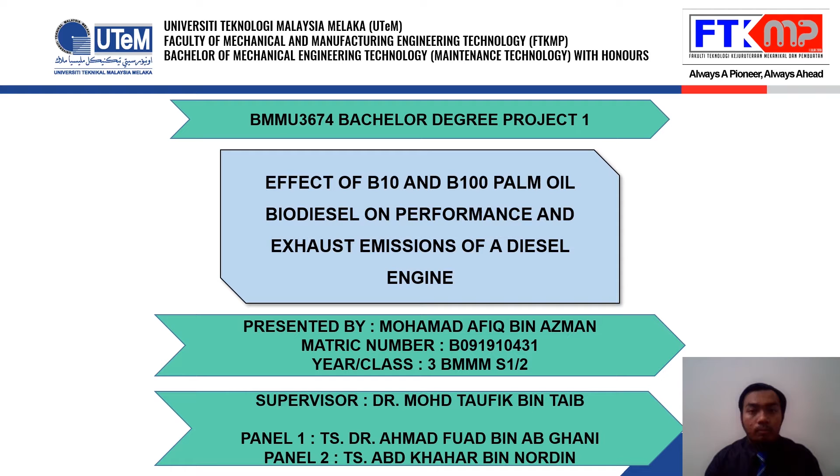My matric number is B091910431. I am from 3B. I am under supervision of Dr. Mohamad Taufik bin Taib, and my research title is Effect of B10 and B100 palm oil biodiesel on performance and exhaust emissions of a diesel engine.

This is my online presentation outline that starts from problem statement to objective, then to scope, literature review, methodology, and lastly preliminary findings.

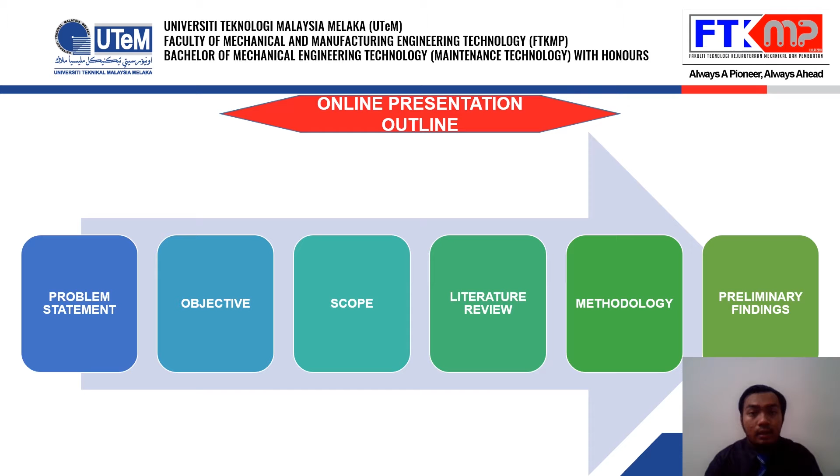For introduction, diesel is one of the primary sources of air pollution in the world because it releases a high amount of carbon monoxide emission and it affects the amount of greenhouse gases that links to climate change and global warming. The crude oil source collected from nature decreases year by year, so fuel price will be higher and affect the nation's economic situation like what happened nowadays.

One of the best solutions to solve this problem is by using biodiesel diesel blends fuel in diesel engines. Biodiesel can be produced from plants like palm, and Malaysia has an advantage for this source since it is widely used and produced in Malaysia. The various compositions of biodiesel blend will produce different outcomes from the engine, and various research has been done to improve the products over time.

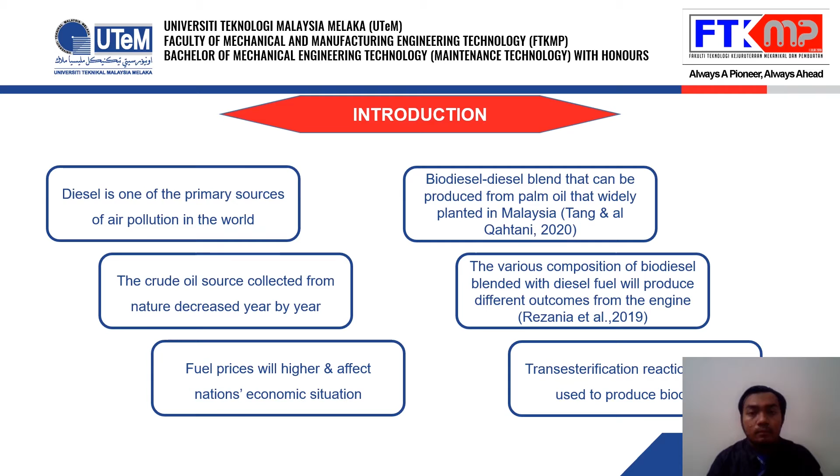Biodiesel can be produced by using the trans-esterification process that will alter its properties to be close to diesel properties to produce performance exactly like diesel fuel. Different feedstocks used to produce biodiesel contain different numbers in their physicochemical properties. Physicochemical properties consist of acid number, calorific value, cetane number, kinematic viscosity, and flash point.

Different compositions of biodiesel will produce different numbers of gas emissions. Compositions means the volume ratio of biodiesel with pure diesel. Different compositions of biodiesel will generate different engine performance from the diesel engine. From these problem statements, the aim of the study is to clarify the exhaust gas emissions and engine performance produced from B10 and B100 palm oil biodiesel diesel blends fuel.

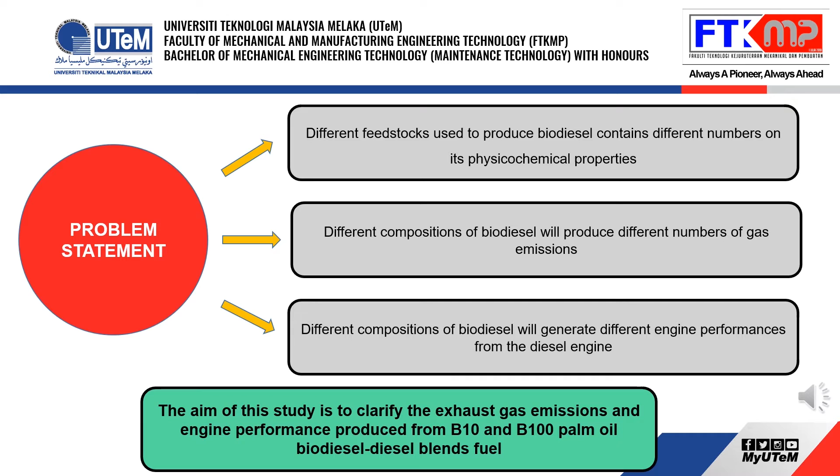The first objective is to produce biodiesel using the trans-esterification process. Second objective, analyze the diesel engine performance of B10 and B100 biodiesel. And last objective, investigate the exhaust emissions of B10 and B100 biodiesel.

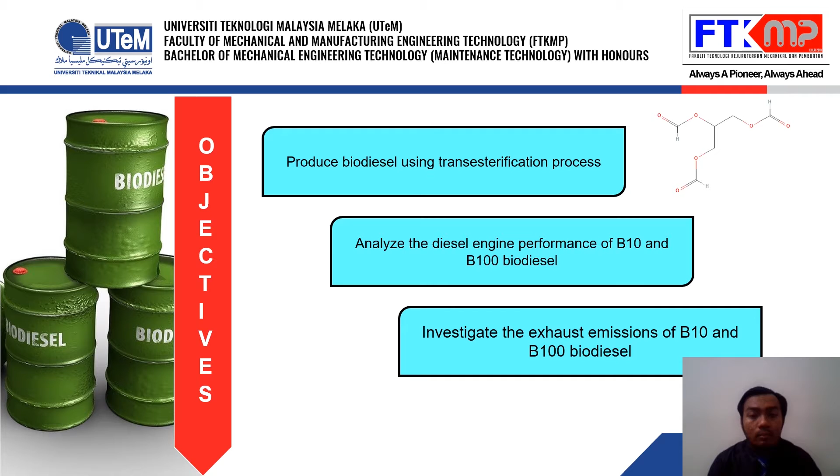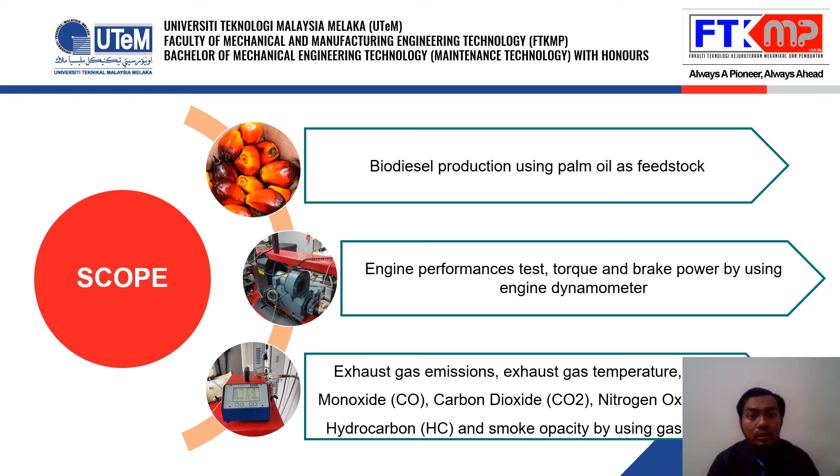The scope of this research is biodiesel production using palm oil as feedstock, engine performance test, torque and brake power by using engine dynamometer, and lastly exhaust gas emissions, exhaust gas temperature, carbon monoxide, carbon dioxide, nitrogen oxide, hydrocarbon, and smoke opacity by using gas analyzer.

For literature review, I had simplified the related terms to my research for better understanding. First, biodiesel is made from feedstocks that combine with pure diesel. Pure diesel is not the one being sold on the market. It can only be obtained from oil and gas companies like Petronas and Shell.

Feedstocks can be categorized into 4 generations, which are first, second, third, and fourth generations. First generation feedstock consists of edible oil, such as corn and palm. Second generation feedstocks consist of inedible oil, such as karanja and jatropha. Third generation feedstocks consist of waste, such as waste cooking oil, animal fat, and algae. Fourth generation feedstocks consist of solar energy being converted to biodiesel, such as photobiological solar biodiesel.

Biodiesel can be produced into various compositions such as B10, which means 10% biodiesel combined with 90% pure diesel. The higher the number, the higher the biodiesel volume used, and the lower the pure diesel volume used. Next, trans-esterification process. There are many other processes other than trans-esterification, but only this process is possible to produce biodiesel with similar qualities as conventional diesel.

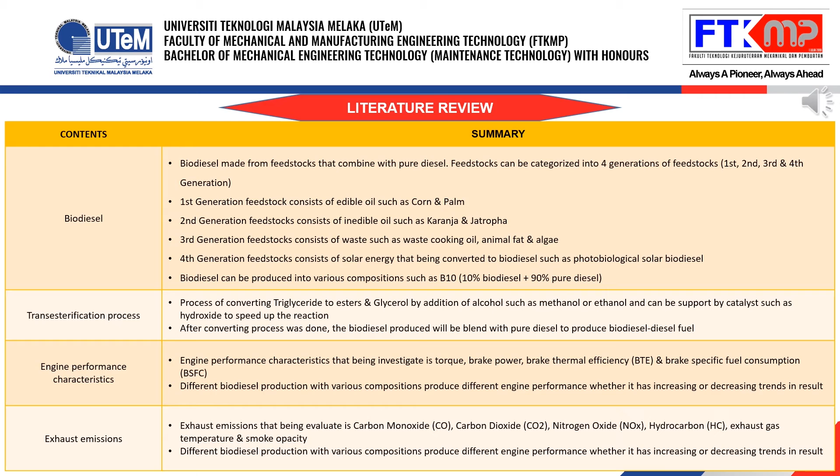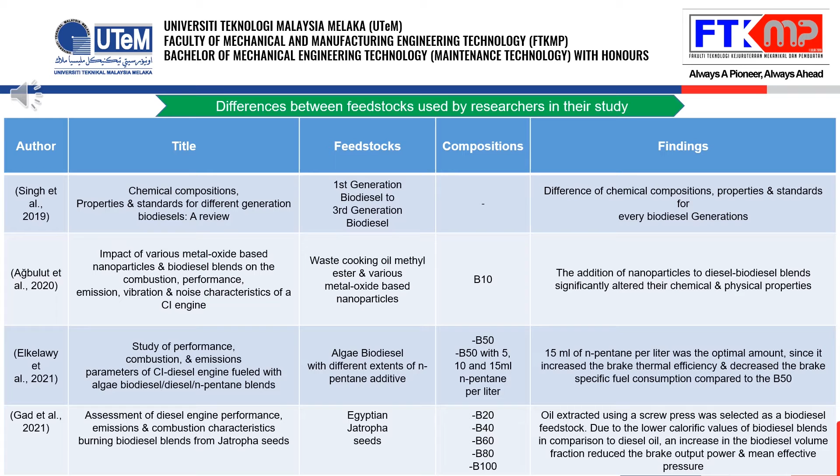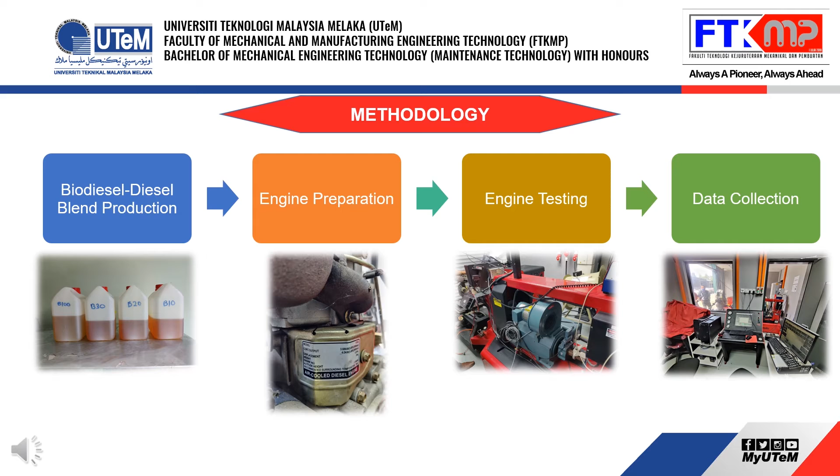For methodology, the process starts with biodiesel diesel blends production, to engine preparation, to engine testing, and lastly data collection. This is my flow chart for the methodology process.

For biodiesel diesel blend production, a blending process has been used to produce biodiesel diesel blends. It is the last step of the trans-esterification process. 1 liter of B10 has been produced from 100 ml palm oil biodiesel and 900 ml pure diesel, that means 10% palm oil biodiesel combined with 90% pure diesel.

Both pure diesel and palm oil biodiesel are blended separately using an electromagnetic stirrer until 100 degrees Celsius, then cooled down to 60 degrees Celsius. Both items are poured in a beaker and blended again until the temperature reaches 70 degrees Celsius, then cooled down to room temperature before being stored in an HDPE container.

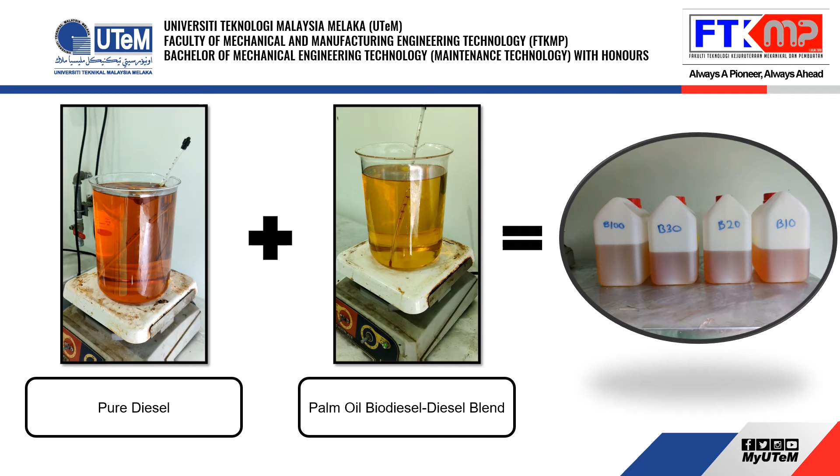For engine preparation and testing, a single-cylinder fuel injection diesel engine was overhauled to inspect the engine components. The engine was coupled to the dynamometer coupling and a gas analyzer sensor was attached to the exhaust. The engine is tested using conventional diesel first to detect any leakage or damage from the engine components. If the engine is free from any leakage or damage, the palm oil biodiesel diesel blend will be tested for its performance and gas emissions on the same engine.

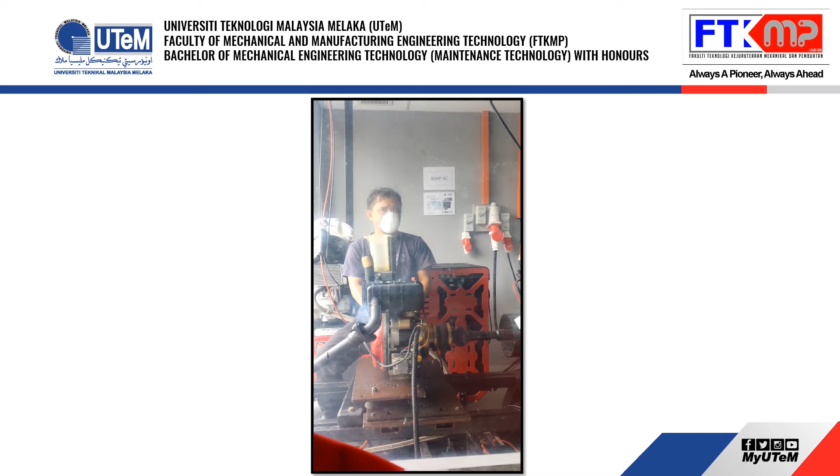For data collection, engine performance data and exhaust emissions data were recorded by Dynomite software. The data was plotted in Excel to study the trend of the data collected from the software. Engine performance consists of torque, brake power and brake-specific fuel consumption. For exhaust emissions, carbon dioxide, carbon monoxide, nitrogen oxide, hydrocarbon, exhaust gas temperature and smoke opacity.

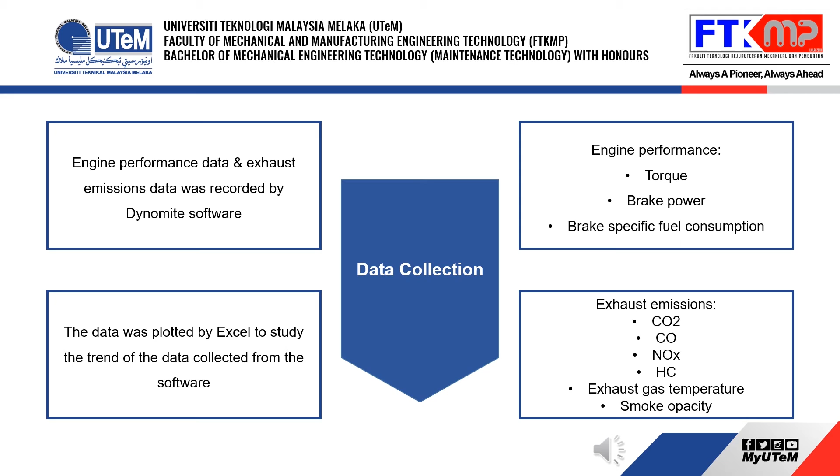For preliminary findings, data from conventional diesel used in the single-cylinder fuel injection engine was recorded and evaluated. For the first graph, the curve becomes steeper from zero load to full load because the piston pushes regularly, which gives a better horsepower output, and the engine did not lose power during the combustion process.

For the second graph, the curve becomes steeper from zero load to full load because of the increasing load. Higher load applied to the engine will push the engine to consume more fuel during acceleration. This behavior will assist the engine to maintain the load, and this can avoid overloading the engine.

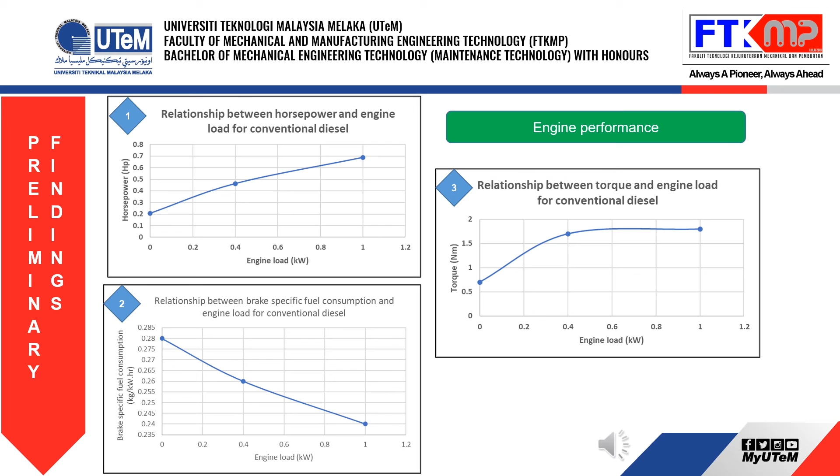For the third graph, the curve becomes steeper from zero load to middle load and slowly becomes constant from middle load to full load because of the increasing load. The engine can still accelerate from zero load to middle load because the load applied can be considered low. But when approaching full load, the engine cannot produce higher torque and it becomes constant along the run.

For the fourth graph, carbon dioxide emission increases because the engine load increases. Higher loads mean higher fuel consumption, so more carbon dioxide will be produced. For the fifth graph, carbon monoxide emission increases because higher load produces more incomplete combustion. For the sixth graph, nitrogen oxide emissions increase with engine load due to an increase in the amount of fuel consumed by the engine. For the seventh graph, hydrocarbon emission increases because of the shortage of oxygen in the engine's operation, which results in a fuel-rich mixture.

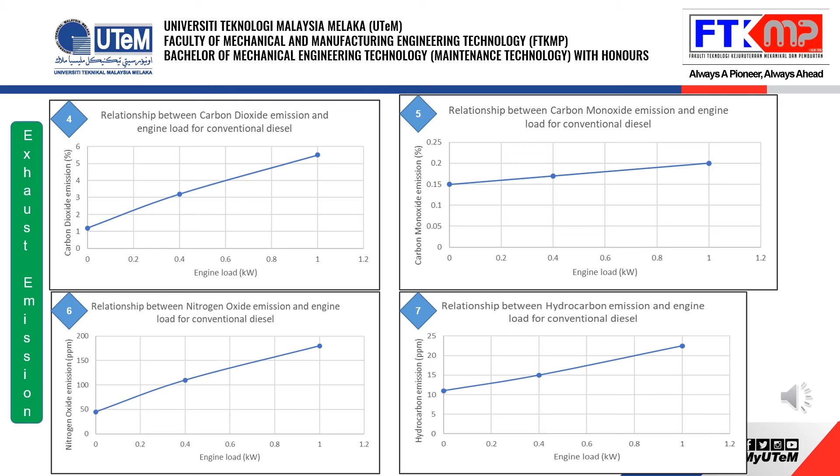For the expected results, based on the article Effect of Biodiesel on the Performance and Emission Characteristics of Diesel Engines, conventional diesel produces higher torque than palm oil biodiesel, and the torque produced becomes lower when the composition of biodiesel increases. Based on the article Performance and Emission Analysis of a Diesel Engine Running on Palm Oil Diesel, carbon monoxide emissions of the palm oil biodiesel diesel blend will be lower compared to conventional diesel, and brake power of palm oil biodiesel will be lower than conventional diesel.

Based on the article Performance and Emissions Characteristics of CI Engine Fueled with Palm Oil Methyl Ester Blended with Diesel Fuel, nitrogen oxide emission will increase as engine load increases for all loads. Based on the article Performance and Exhaust Gas Emission of Biodiesel Fuel with Palm Oil Based Additive in Different Indirect Injection Compression Ignition Engine, brake specific fuel consumption of the palm oil biodiesel diesel blend will be higher than conventional diesel, and higher palm oil biodiesel blends require more fuel to provide the same amount of brake power.

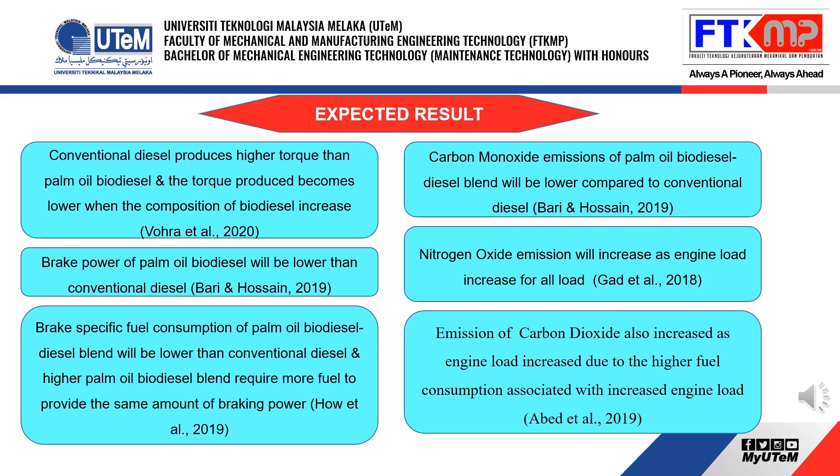Based on Effect of Biodiesel Fuels on Diesel Engine Emissions, emission of carbon dioxide also increases as engine load increases due to the higher fuel consumption associated with increased engine load. Based on the article Performance and Emission Characteristics of CI Engine Fueled with Palm Oil Methyl Ester Blended with Diesel Fuel, hydrocarbon emission will decrease for palm oil biodiesel at all engine loads compared to conventional diesel fuel due to the higher cetane number. Increasing the proportion of biodiesel in biodiesel blends will reduce the hydrocarbon emissions. Based on Effect of Biodiesel Fuels on Diesel Engine Emissions, for exhaust gas temperature, palm oil will produce a higher exhaust gas temperature compared to conventional diesel.